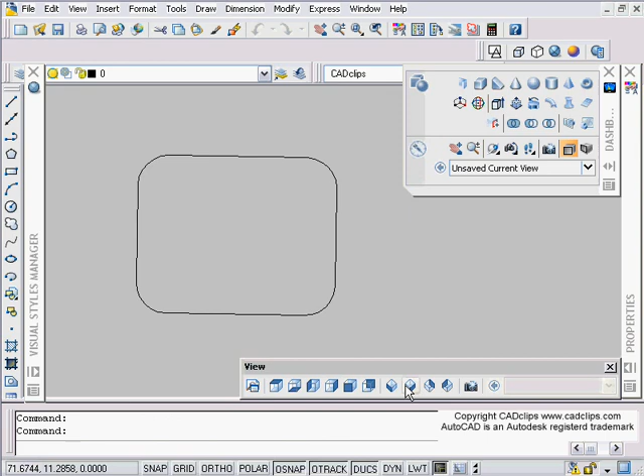In this lesson we're talking about this awesome new Loft tool which we have over here on my dashboard off of our 3D Make control panel. I've just started off, I've got a little bit of geometry, nothing much on this drawing so far, nothing up my sleeve. There's really three ways to use the Loft tool. We can use the cross section only, we can use a path, or we can use guidelines.

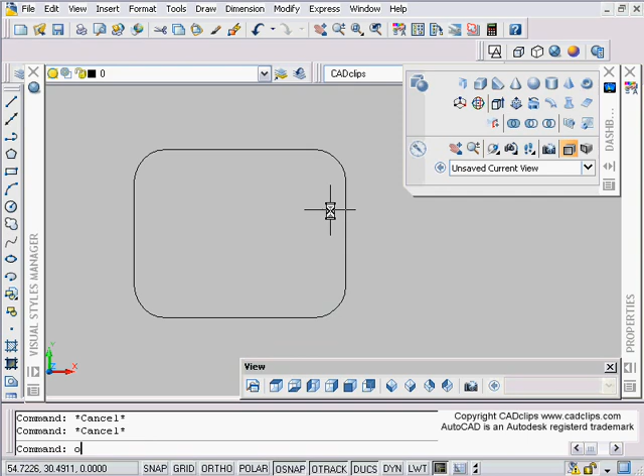So to start off with, I'm just going to take this, start from grassroots, and I'm going to say offset through, going to pick on here, and pick to get basically some points. Then I'm going to go to my nice 3D view, because this next move won't work if I'm in wireframe. I have to go to a 3D view.

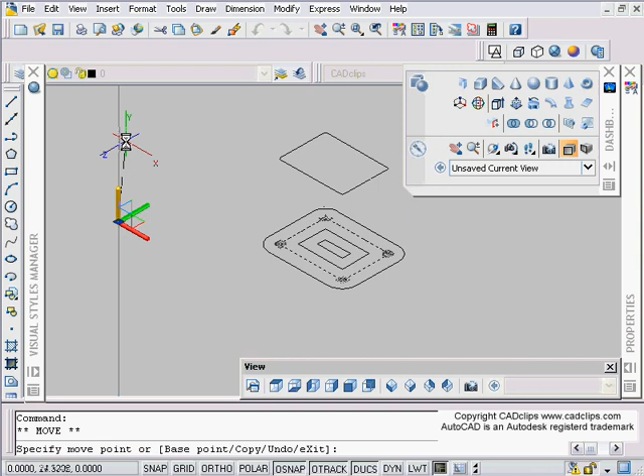I'm going to pick on this object, hover over here, drag up and type in 5. Hit escape. I'm going to pick on this next object, go over here, click, drag up and type in 10. I'm going to click on this last object, hover over here, click, drag up 15. So now I've got those objects basically raised up, and I can look at that from the front if I want, or I can look at it back from my 3D angle.

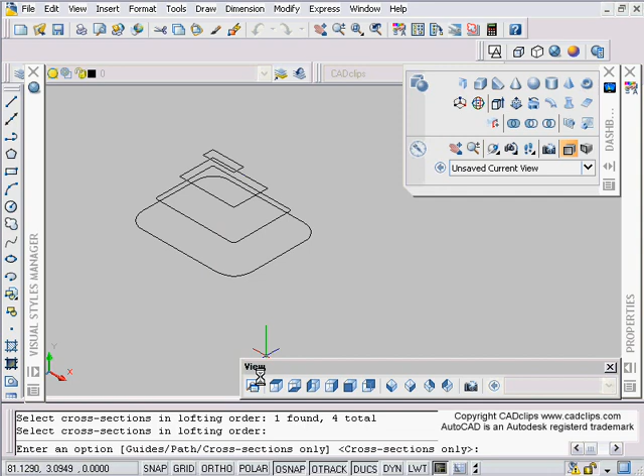Now I can go to my Loft tool, and it's going to say select cross sections in lofting order. So 1, 2, 3, 4, enter, and I'm going to use cross sections only, hit enter, and then it's going to bump me into my lofting options, surface control at the cross sections. Do you want it to be ruled? Do you want it to be smooth fit? Normal to? And then you can experiment with some of these. Drafting angles, you can apply those in there as well.

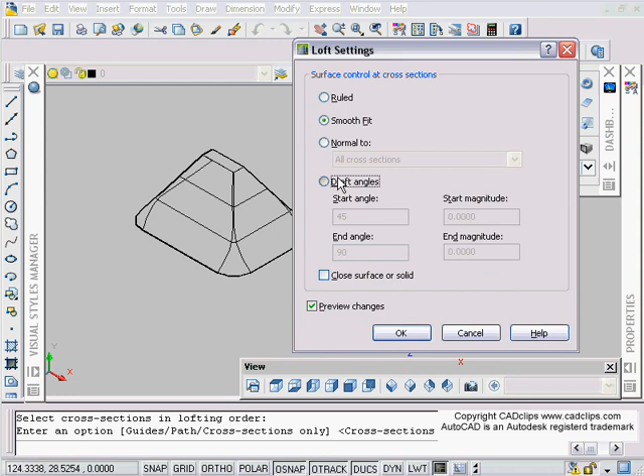Start magnitude, etc. Be careful, because the busier it gets, the more complicated the curve, the more horsepower you'll need in your computer. So preview changes is nice, because as you go through here and you click on here, you can see what happens as you make your changes, the preview. Very nice. Magnitude, etc. Not sure what these are. Normal to, smooth, drafting angles, etc. And then hit OK, and there's your new lofted surface that you've created.

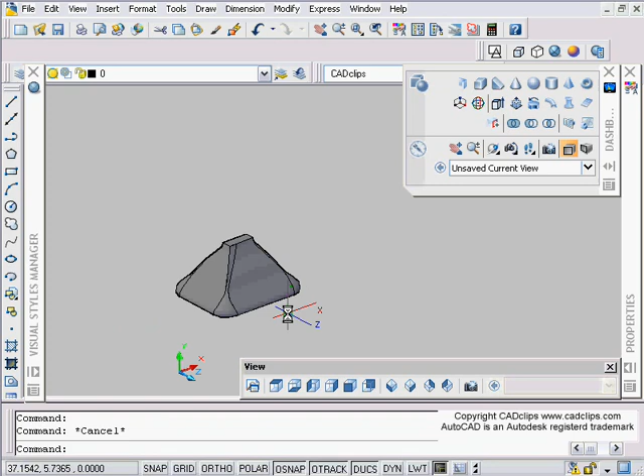So experiment with that. You can go back and shift middle mouse button, maybe click right on it, then shift middle mouse button, rotate that around. So that's lofting, and there's many different ways you can do that, but it's not a difficult command. Now I can go back to here. I'm going to do the second one. I'm going to start by drawing a line.

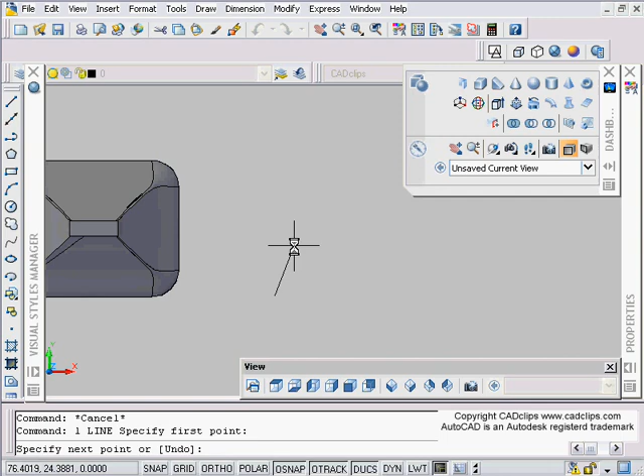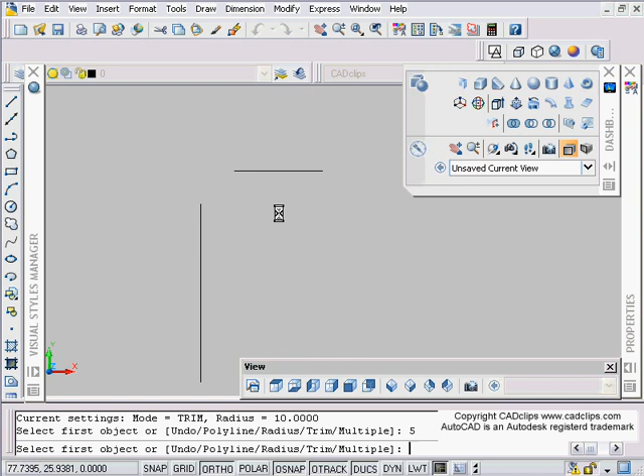First time I tried this experiment, I drew a polyline and then used the arc option of the polyline and then the line segment part of the polyline, but it didn't work. So I'm reverting back to just drawing lines and then filleting with a radius of 5. Maybe even make that a bigger radius. Fillet radius 10. No. Radius of 7. Fillet radius 5. There we go. Sorry about that.

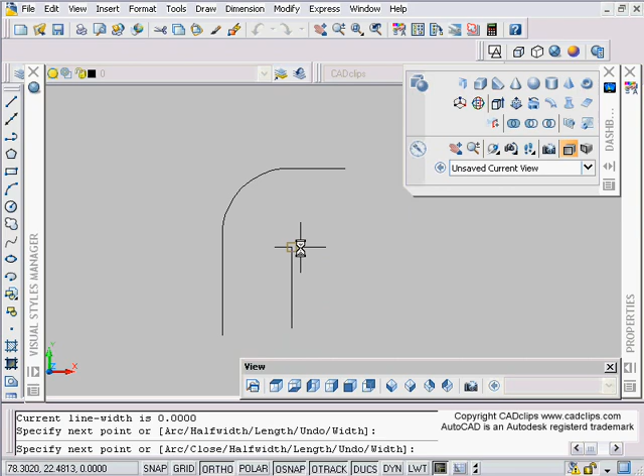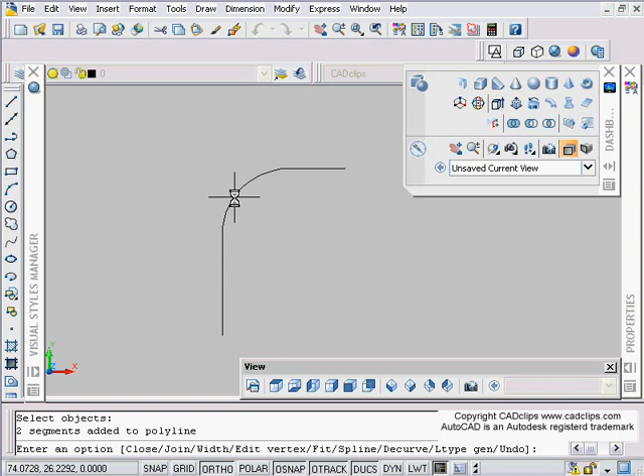And then drag this. My point being is that when I first tried to set up this demonstration, I just drew a polyline like this and then used the arc option of the polyline and then used the line option with my ortho like this and created the polyline right off the bat that way. And it didn't seem to work, so you may run into the same thing. So now I'm going to go PEDIT for polyline edit, pick on here, J for join those up. Now I have a polyline. Just some extra added little setup here for you.

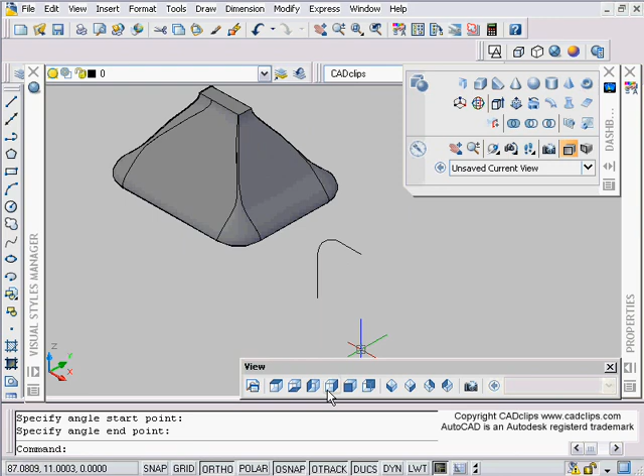Now I'm going to use my new cool 3D rotate command, pick on here, enter, base point here, the axis that I want to rotate around is this one, click on here, ortho on from here up to there. Okay. Now I have that. Now I can go look at the front view if I want, and I can stretch that, do what I want with it, use my grips, etc. Go back to my isometric view.

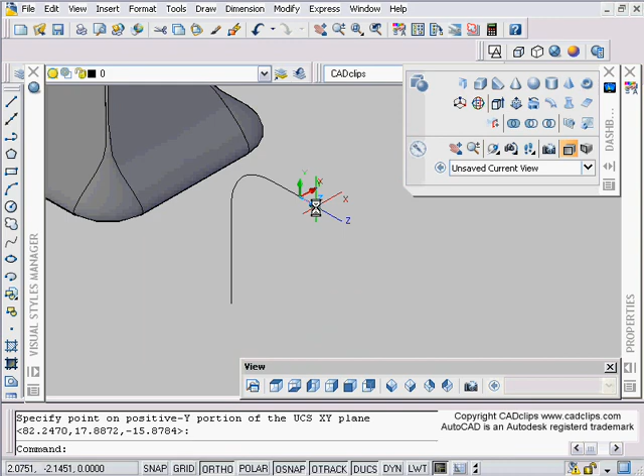Okay, now I'm going to get sneaky and use my UCS command. UCS enter, 3P enter for 3 point, and I'm going to say origin is here, X is here, Y is there, and now I can draw right at the end of that. Now I can draw a circle, okay, in the end of here, drag it out, place a circle.

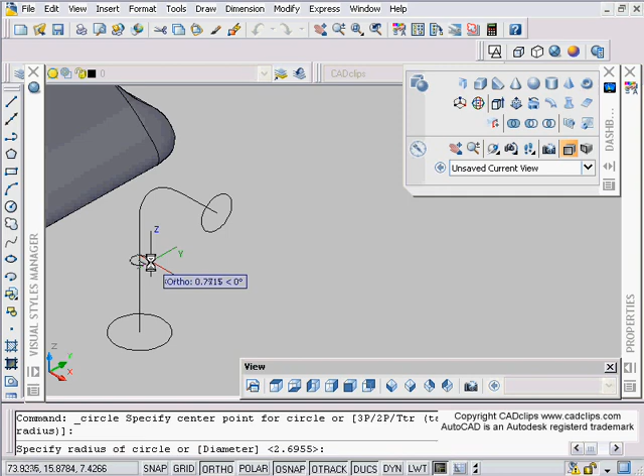Now I'm going to type UCS, enter, W, enter for world, go back and draw another circle at this endpoint, down here, draw another circle, make sure I snap to somewhere along here, something like that. Okay, now, as I shift and rotate around here, you can see that there's my objects.

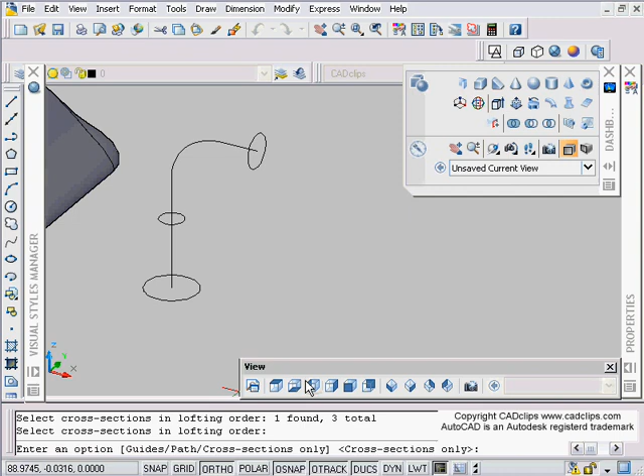Here we go again. Loft, select the cross section first, no matter what, enter, and then I'm going to say P for path, pick my path, and there's my object. Ta-da! Okay, click on here, shift middle mouse button, move that around. Then you can use all our other great slice tools and whatever you want. Okay, so that's again just a sample of how you can do that. There's many other ways of doing it.

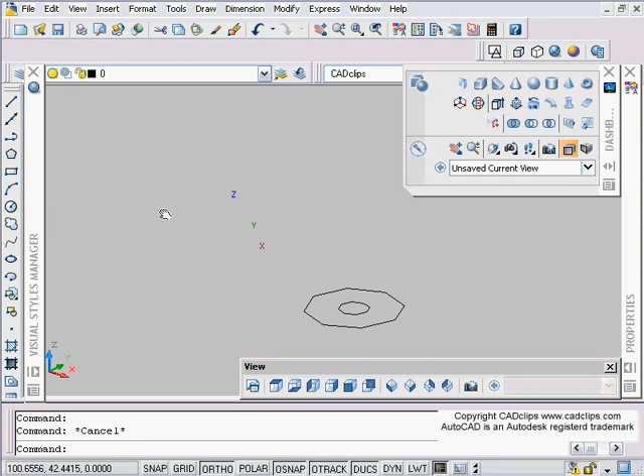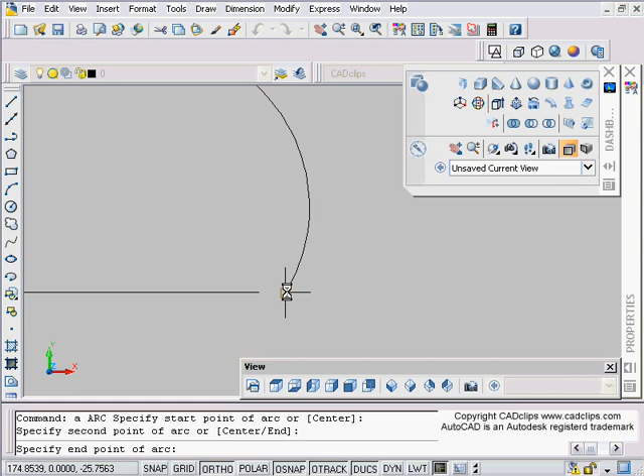Okay, let's take this guy, move him up, hover over here, pick there, move up by maybe 15 units, hit escape. Okay, now I'm going to go to the front view and I'm going to draw an arc from the endpoint of here out to here to the endpoint of there, and I'm going to go look at that in 3D and I can say okay, that looks good. Go back to here, zoom in over here, get ready to array these around.

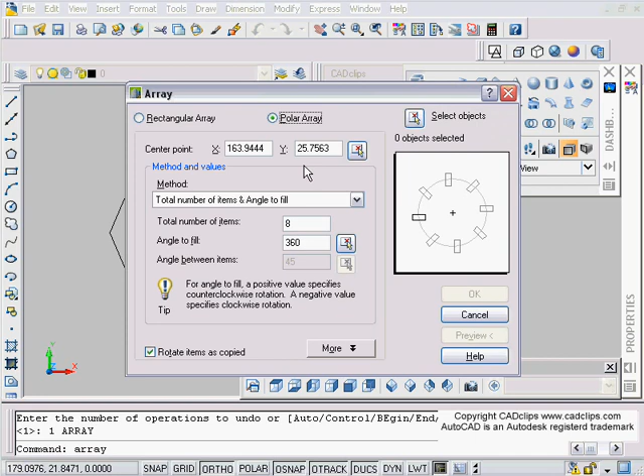So now I can just use my array command, and I don't have a toolbar up, so I'll type it in. I'm going to go in there, I'm going to say select objects here, enter. I'm going to say rotate items as they're copied. I'm going to say I want 8 items over 360 degrees.

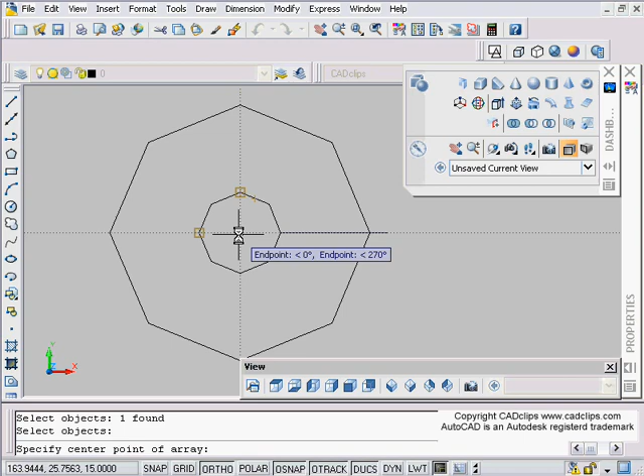Polar, center point I'm going to pick here, and I'm going to hover and place a node. Hover, place a node, and then I'm going to go in the middle of that using my object tracking, pick, and then I'll do a preview, and then I'll hit accept. Okay, then I can go to my 3D view, and now I have that ready.

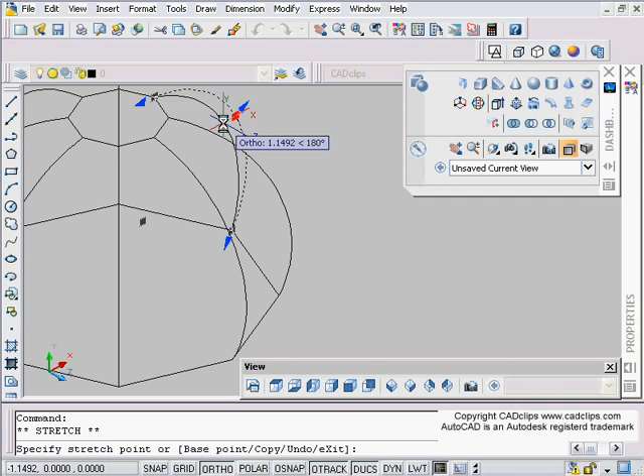Now I can take these if I want and start to drag these around using my grips. Oh, you have to be careful because your object snap will get in your way. Make some slight imperfections to this so it's not exactly a basketball. Okay, as I please, it doesn't matter.

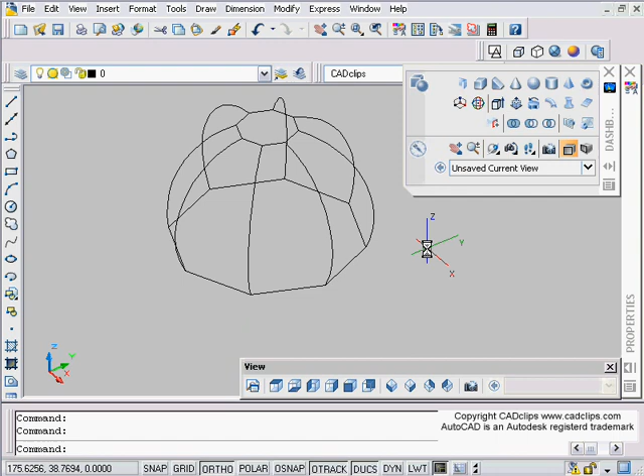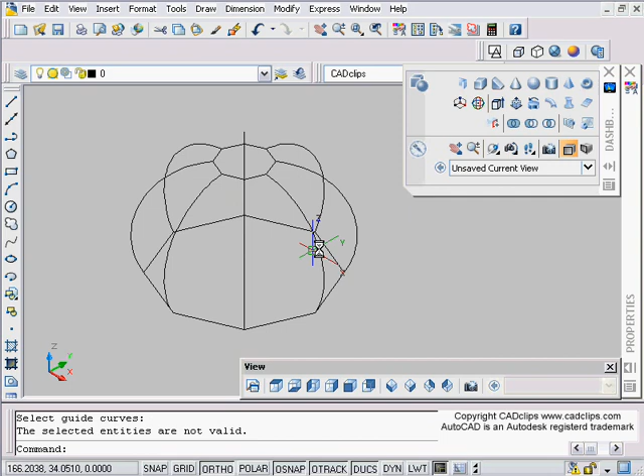What's going to happen now is we say loft, select our cross section here, enter. We're going to say guidelines, G for guidelines, and I'm just going to do a crossing box through there, hit enter. Oh, something wrong. Okay, well, let's just do an undo back to before we did those grip changes and see if we can get it to work this time. Here and here, enter, guidelines. Oh, the selected entities are not valid, so I've got a problem.

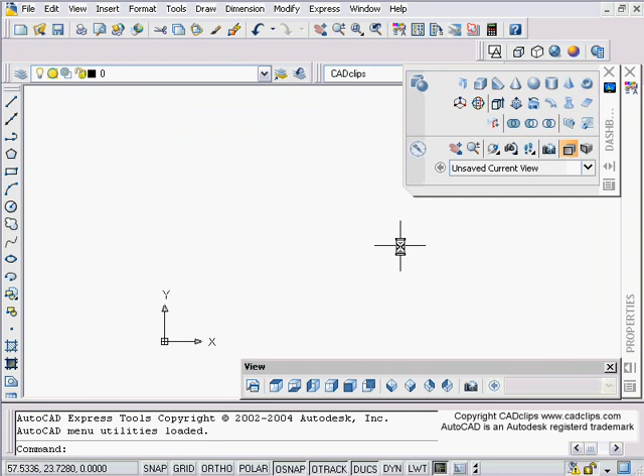For some reason that geometry hasn't been working, and I do a lot of experimenting between CADclips here. So what I'm going to do, I'm going to start fresh by going File and new file right off the bat. And I'm going to start right in here by creating my geometry again by creating a polygon by saying 8 sides, and center is here, and I will use my ortho and inscribe to place that.

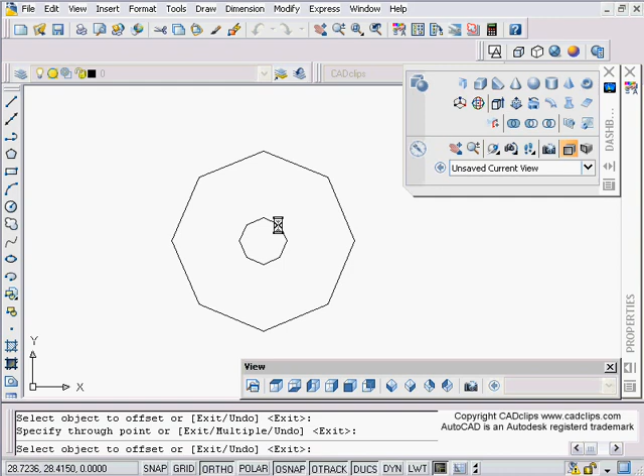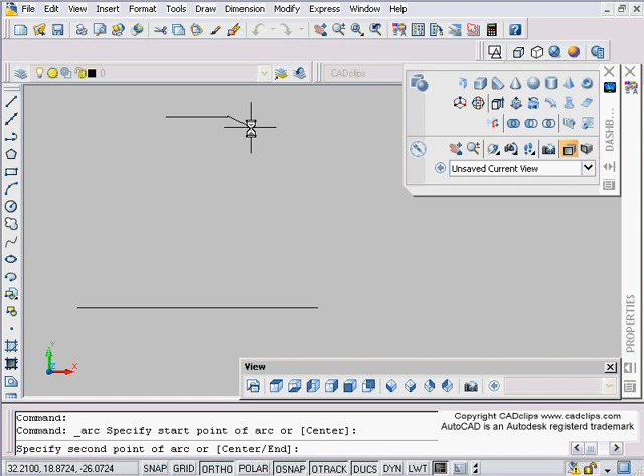Okay, then I'm going to take that and I'm going to offset it through, say, here. Now I'm going to go to my front view. Oh, I need to move that up. 3D view, switch over to one of these, so then I can click on here, drag this up 20 units high. Okay, go back to my front view, draw an arc from, make sure I get the end point of there, to somewhere over here, and I want the end point of there. Okay, back to my top view.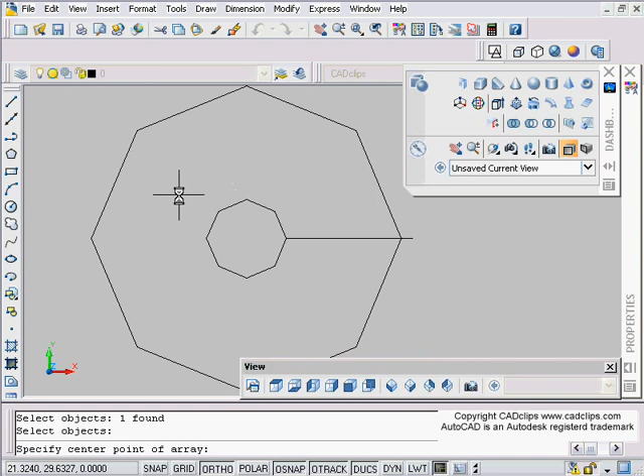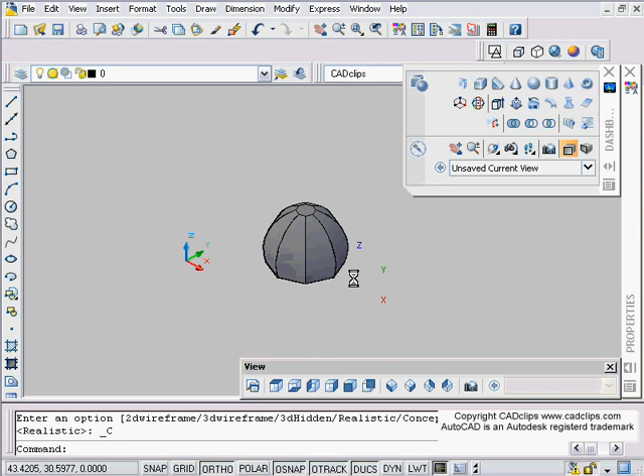And then I'm going to take this and I'm going to array it. I'm going to use 8 objects, select this, enter. Center point is going to be hovering here, here, there. Do a preview and accept it. Okay, back to here, cross my fingers, try this again. Loft, here's my objects, enter, guidelines, pick, enter, and there we have our shape that we tried so hard to get.

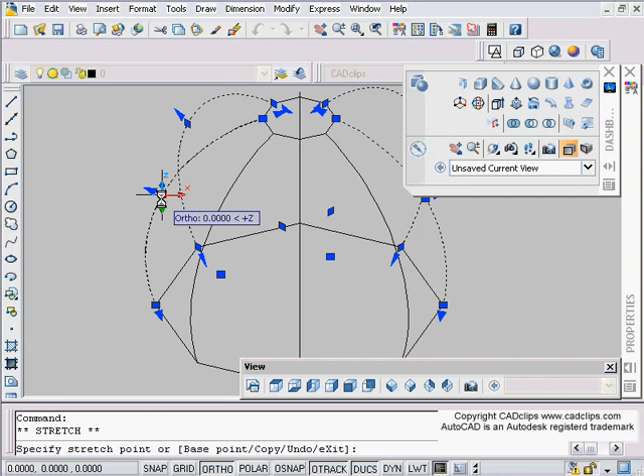Now I'm going to undo this back. Once you have that, you can start to do what I was doing, taking my OSNAP off, maybe grab some of these and make some imperfections in here, because it doesn't have to be exactly smooth all the way around. Okay, do another loft. Pick these 2 objects as my section, G for guidelines. Here, it creates that shape, go in here, add some materials, etc.

So following those guidelines. And again, I can have more than one cross section in here to form that kind of free form shape that I'm getting. And remember, the more complex you make this, the more horsepower you're going to need on your computer.